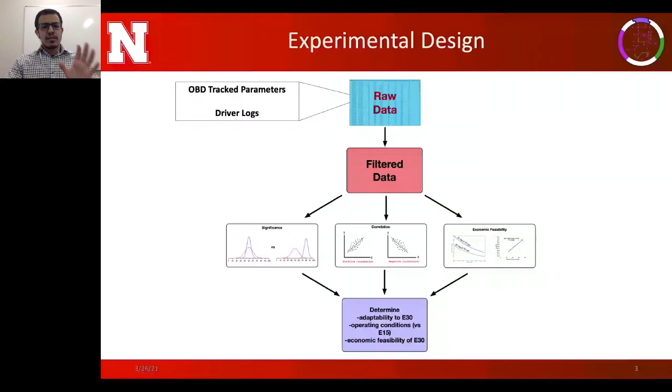So I won't go into details about all the parameters that we're tracking, but just some of the ones to keep in mind. The ones that are relevant are things like long-term fuel trim, which is basically telling you if the vehicle is detecting that difference in air-to-fuel ratio. And then things like engine load, which we use as a proxy for looking at engine performance. And then the oxygen sensor readings, which indicated if the vehicles are actually able to maintain an ideal fuel-to-air ratio even after increasing the oxygen content because of using E30. And we also looked at things like coolant temperature as an indicator of engine temperature to make sure that there weren't any differences due to changing the ethanol content.

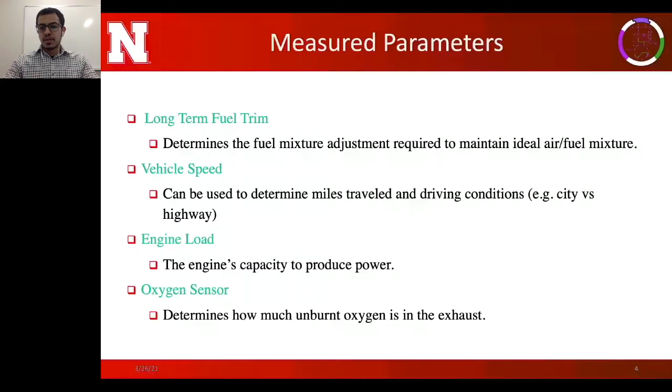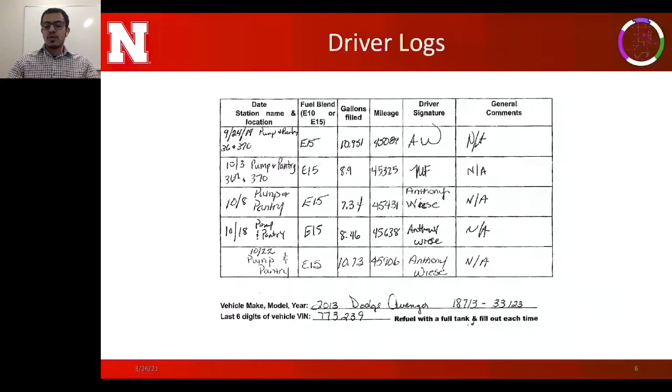So moving on to the data analysis methods, I'll just give a very brief overview of the three main methods that we used. So the data was broken down into two parts. There are parameters that we expect to remain constant, things like, as I mentioned, the engine temperature, and the amount of unburnt oxygen that the engine's control module is trying to keep at a constant rate. For those parameters, we want to make sure that the distribution between the two different fuel types remains the same. That will give a good indication of the adaptability of the control module to correct for the higher ethanol and oxygen content.

And then we have parameters that are constantly changing, right? For those parameters, we wanted to use more complex correlation and classification methods that allow us to look at patterns in vehicles operating on E15, whether they're similar or different from those operating on E30. That would give us a more accurate indication of how performance is changing.

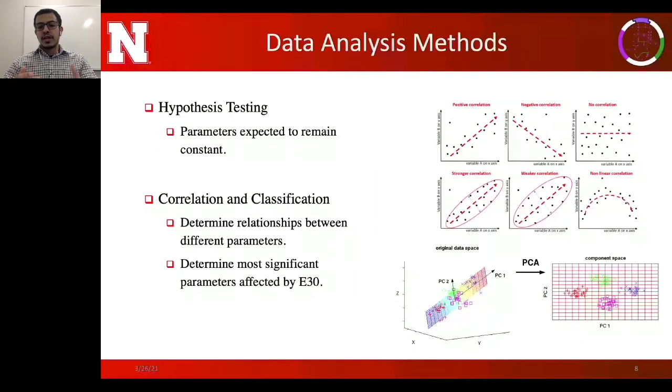And then for the economic analysis, as I mentioned, based on the driver logs and the changing costs per gallon of the different fuel types, we can get an average cost per mile for the time period that the study was done over.

So some information on the vehicles that were participating. We had a total of 49 different vehicles, 9 of which were from the Nebraska State Patrol. As you can imagine, these vehicles were driven under quite harsh and very extreme conditions, and they end up covering a lot of mileage, more than 20,000 miles per year. So we got a significant amount of data just from those 9 vehicles. Then from the Nebraska TSB, we had data from 40 different vehicles, around 450,000 miles driven, for a total of approximately 640,000 miles driven during this whole year period.

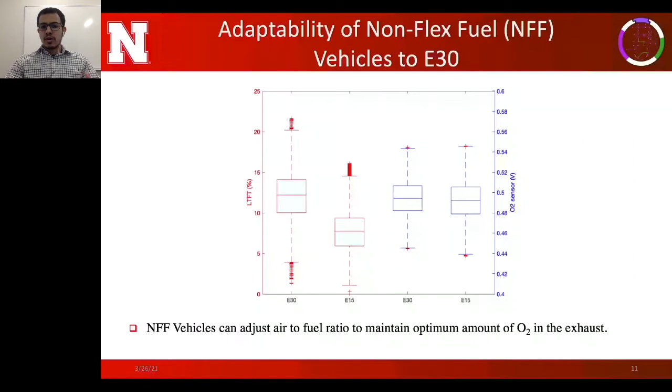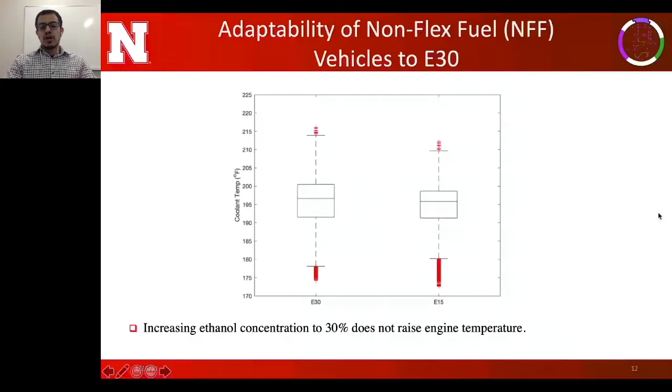Then, moving on to analyzing the more complex data, that's the dynamic data. The main question we're trying to answer is, does the performance of non-flex fuel vehicles change when we operate on E30 as compared to E15? We broke this down into two main questions. First, can we use all of this data to train a model that predicts performance accurately? In this case, we used load or volumetric efficiency as a proxy. It turns out that we can; we used different methods I'm not going to go into here, but we can predict performance to a high degree of accuracy. Once we made sure that was the case,

And then moving on to looking at fuel efficiencies, we know there was a very slight decrease in fuel efficiency, just around 0.6 miles per gallon, a lot lower than you'd expect from the energy content, because, as you all know, that higher octane rating is able to offset most of the difference in efficiency. And then when you combine that with the lower cost of E30, even during the course of this year, the cost per mile evens out. And the main takeaway from this is that for a price difference of more than 2.5%, E30 becomes the more economically viable fuel to use.

And so moving on from there, we wanted to look at what the impact of this study would look like if it was extended to incorporating E30 into state fleets. And so we looked at ethanol consumption. As you can see, just incorporating it into the entirety of the Nebraska TSB and the state patrol fleets, going from E15 to E30, you get an increase of around 66,000 gallons of ethanol being consumed every year.

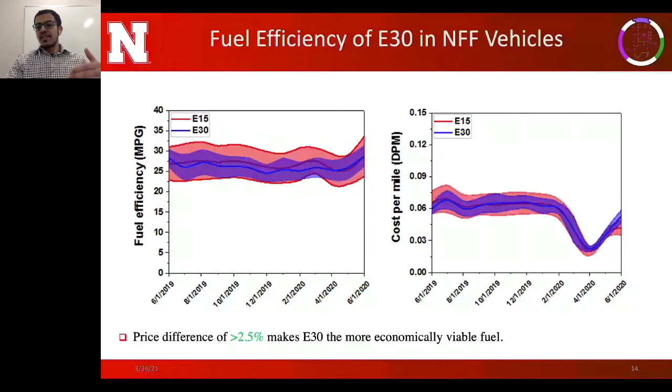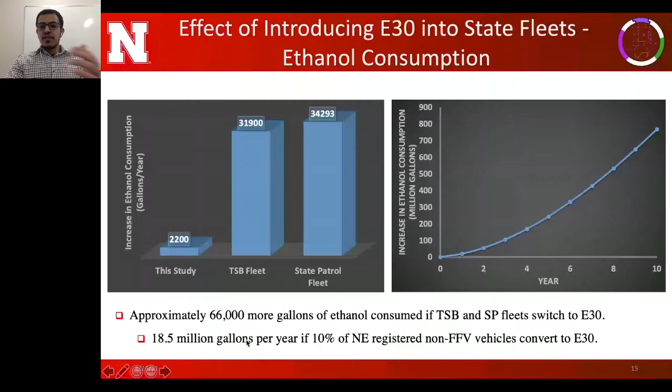And so you can see that the numbers start adding up very quickly if this goes to a statewide or a nationwide implementation. So with all this analysis, the next question is, what can we do next? Some of the things that we're considering are, first of all, going to a longer term demonstration, making sure that these trends are constant, and looking at how prices of both gasoline and ethanol change over a longer time period. And then also looking at different makes and models. We had a total of 3 or 4 makes and models in this demonstration.

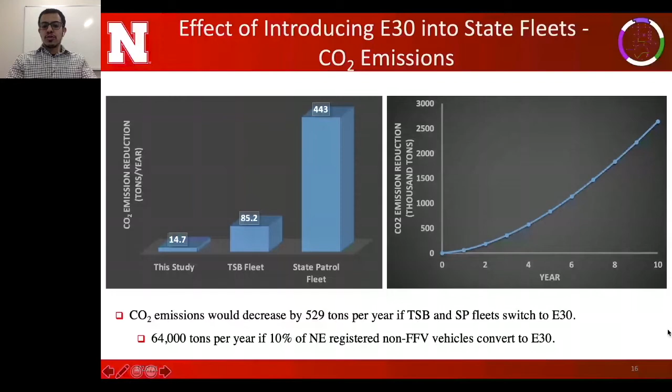So do these trends hold if we go to, for example, pickup trucks or something like that? And the final thing that we realized was that we don't need as many assumptions if we use retail prices instead of rack prices. So if we were to do this next time, we would use retail prices for the economic analysis. But with that, I'd like to conclude this talk, and I'd be happy to answer any questions that you have.